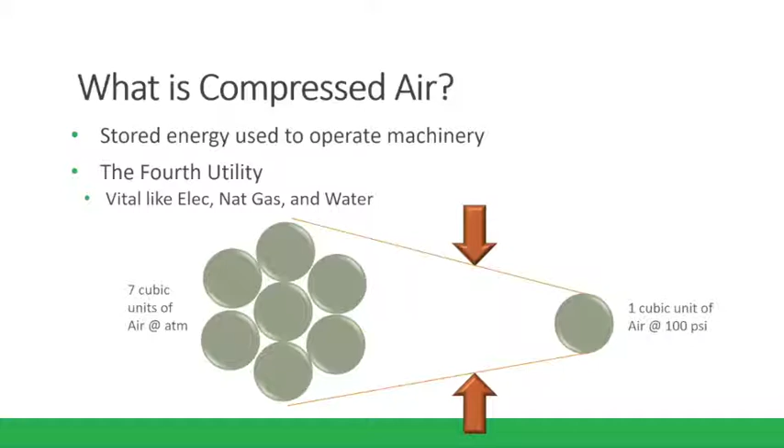Compressed air systems consist generally of a supply side, which includes the compressors and air treatment, and a demand side, which includes distribution and storage systems and end-use equipment. A properly managed supply side will result in clean, dry, stable air being delivered at the appropriate pressure in a dependable and cost-effective manner. A properly managed demand side minimizes wasted air and uses compressed air for appropriate applications. Improving and maintaining peak compressed air system performance requires addressing both the supply side and the demand side of the system and how the two interact.

A modern industrial compressed air system is composed of several major subsystems and many subcomponents. Major subsystems include the compressor, the prime mover, the controls, the treatment equipment, accessories, and of course the distribution system. The compressor is the mechanical device itself that takes that ambient air and increases its pressure. The prime mover powers that compressor. Controls serve to regulate the amount of compressed air being produced, and the treatment equipment removes any contaminants from the compressed air, with accessories to keep the system operating properly.

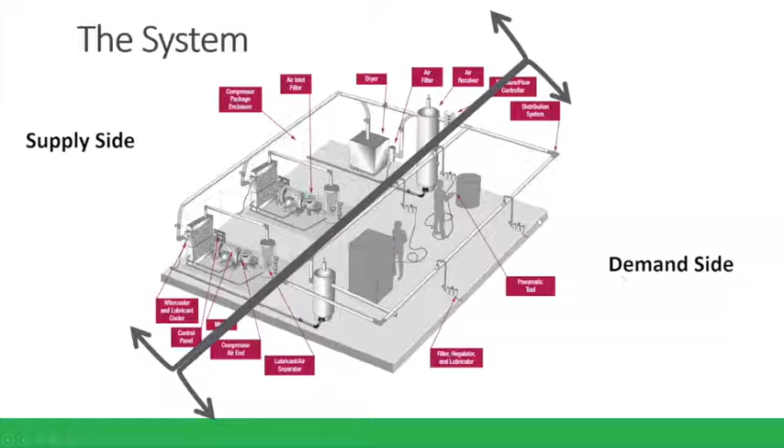All right, so system efficiencies here.

People often assume that because they breathe air, compressed air is free. Well, it is not. To compress the air, one would find that most of the electrical power inputted to compress that air is lost in the form of heat due to the physics and thermodynamics involved.

Once the air is compressed, it must be transported, and losses occur and inefficiencies arise along the way. So in the end, you're only getting about 10 to 15% of the original energy input that performs the useful work in a manufacturing process.

In other words, about 90% of the energy to produce and distribute that compressed air is typically lost, which makes it all the more important to think of compressed air as a resource for production, and that it might be the most inefficient source of energy in a plant.

So again, compressed air is generally inefficient and can be expensive. If we were to think about it in terms of operational costs, how much does it cost to operate an average compressed air system? Well, a quick rule of thumb is that on average, it costs 7.6 cents per horsepower per hour.

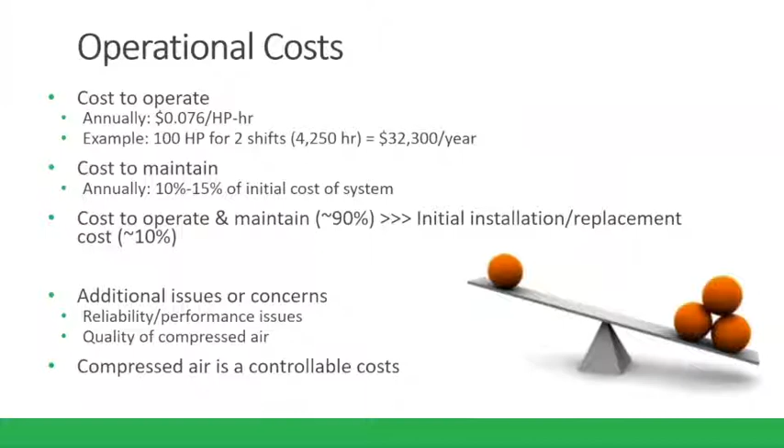So let's talk about the economics for management. That's usually one of the driving factors. A lot of times we talk about it at the end, but let's talk about that at the beginning here. Talking about compressed air systems can be difficult if we're talking to management, and there are a lot of different ways we can talk about the economics.

So the most common one is a simple payback approach, where you get an estimate in terms of cost to upgrade the system versus the estimate in terms of how much it's going to save, and you divide the two, and you have a simple payback period. How many years or months will I see my money? When will I see my investment pay back?

Another one is the net positive cash flow approach. The net positive cash flow analysis essentially looks at that monthly or annual energy cost savings of a project, and if they are greater than the finance payments, the project exhibits a net positive cash flow immediately and should be implemented.

So a quick example is if you were to finance an energy conservation measure on your air compressor system that costs you $500 a month, but you're saving $600 or $700 a month, then it's again a net positive cash flow, and you're winning right out of the gate.

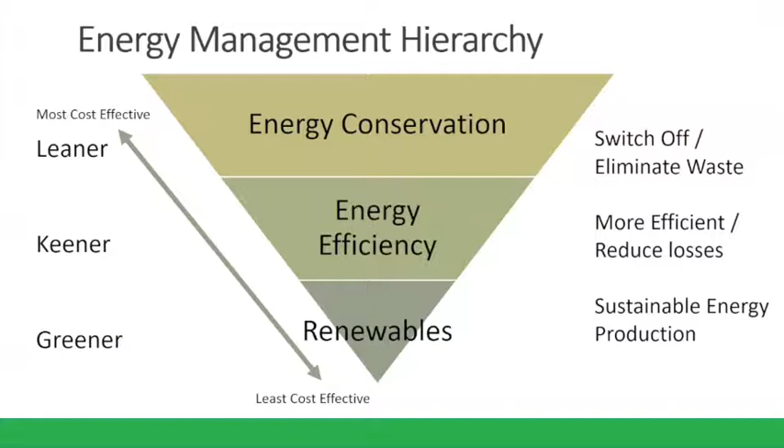All right, energy saving opportunities. Let's get into it.

Compressed air is clean, readily available, and simple to use. As a result, compressed air is often chosen for applications for which other energy sources might be more economical. But users should always consider more cost-effective forms of power before considering compressed air. Many operations can be accomplished more economically using alternative energy sources.

Inappropriate uses of compressed air include any application that can be done more effectively or more efficiently by a method other than compressed air. Examples include abandoned equipment still attached to the system, or idle equipment that's on but not being used. A suggested alternative would be to install a shutoff valve at the inlet process of that equipment and tie that back into the operation of the equipment. You could also have a timer installed if you needed that to be one of the first things to turn on, of course.

Another potentially inappropriate use is cleaning up, drying, or process cooling using compressed air, whereas a better alternative might be a low pressure blower, electric fans, or even brooms. Sparging, aerating, agitating—maybe you're dealing with some liquids—sometimes we've seen compressed air being used for these applications. Well, maybe another alternative that's more appropriate would be a low pressure blower or a mixer.

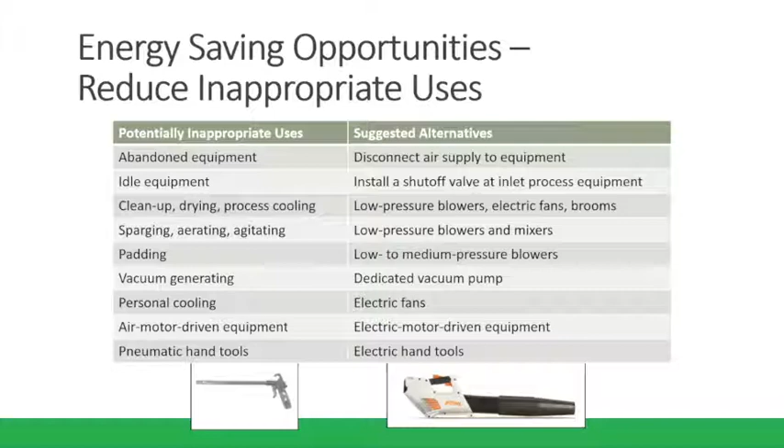If we were to look at another great energy saving opportunity, we would evaluate our system leaks. Leaks can be a significant source of wasted energy in an industrial compressed air system, sometimes wasting 20 to 30% of a compressor's output. A typical plant that has not been well maintained, or where they haven't conducted an air leak survey, might have a leakage rate up to 40% of the total compressed air production capacity. On the other hand, proactive leak detection and repair can reduce leaks to less than 10%.

While leakage can come from any part of the system, the most common problem areas include couplings, hoses, tubes, and fittings - that's where those push-to-lock fittings come into play. The disconnects, O-rings that may have slipped off or were never installed to completely seal, may be missing. Most applications that have an FRL - filters, regulators, and lubricators - that weren't properly set up or have been neglected over time, can be a high source of system leaks.

Open condensate traps - if you don't know where yours is or what it looks like, that could be a source of system leak. Joints and flanges which have a missed or defective weld, controls and shut-off valves where the packing through that stem could be a source, and just old or poorly maintained tools, the point-of-use devices - over time things get worn. These are the common places where you might want to start looking to evaluate some system leaks in your system.

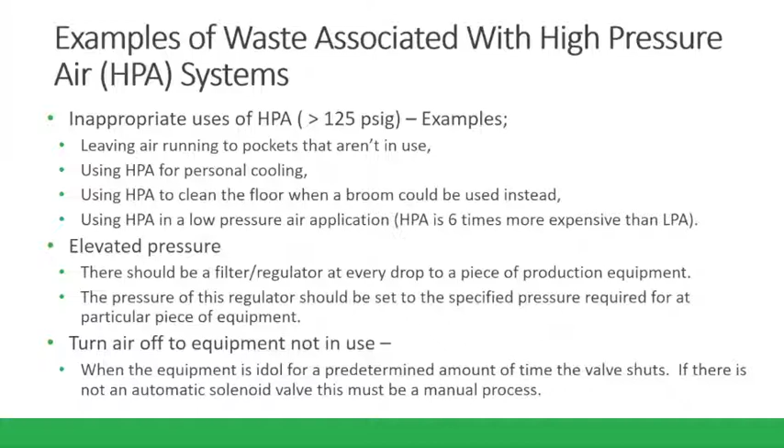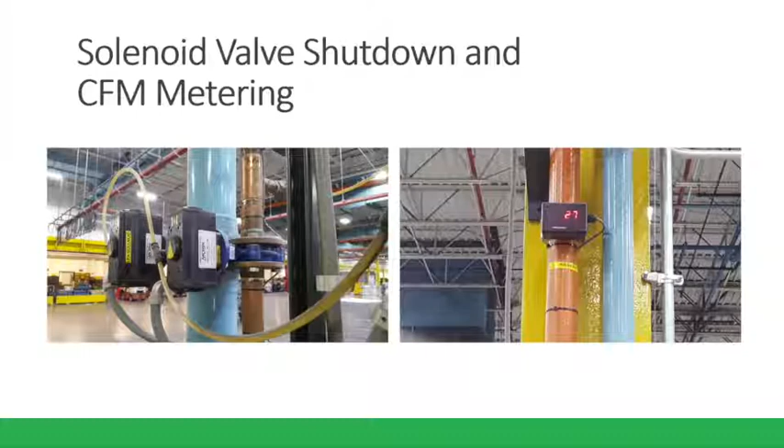Not every application needs a flow meter, but again, it's back to: you can't manage it if you don't measure it. What they find here is, once they did an air leak survey and had that system up and running, that 27 was a good number for their optimal application—that's the amount of flow they needed. If that flow meter starts to increase to 30, 35, 40, you're using a lot more airflow than what you had at baseline, so there might be a leak in the system. It's good for comparison between pieces of equipment.

So what did they do? They installed a leak detection program. They created a statement of need to work with management where they wanted to reduce that system's electrical consumption by identifying and repairing air leaks.

Justification here was that they found their facility operated approximately 1,000 horsepower worth of air compressors. To put that in dollars annually, that's in the range of $335,000 for their typical application. When I looked at all their electrical energy consumption, that was about 14%, so it's a relatively big chunk of the pie when you start considering other HVAC, pumps, fans, lighting, and other industrial process equipment.

They found that their inappropriate uses of the high pressure air were costly. The General Industry Standard for a well-maintained system is leaks at 10%, but they found theirs were a bit higher initially, so they had a lot of opportunity.

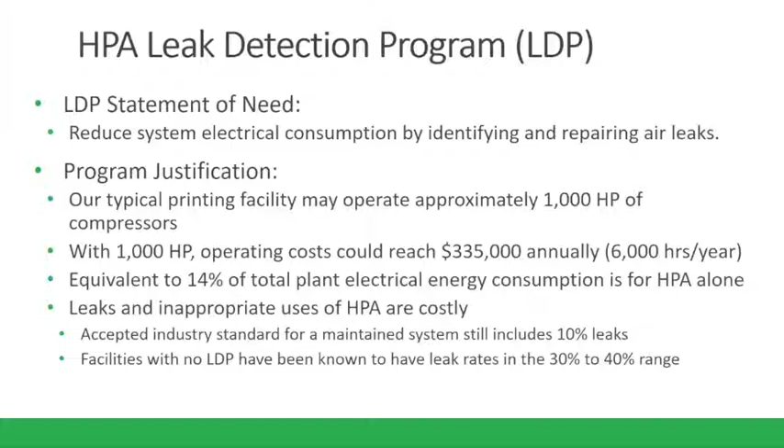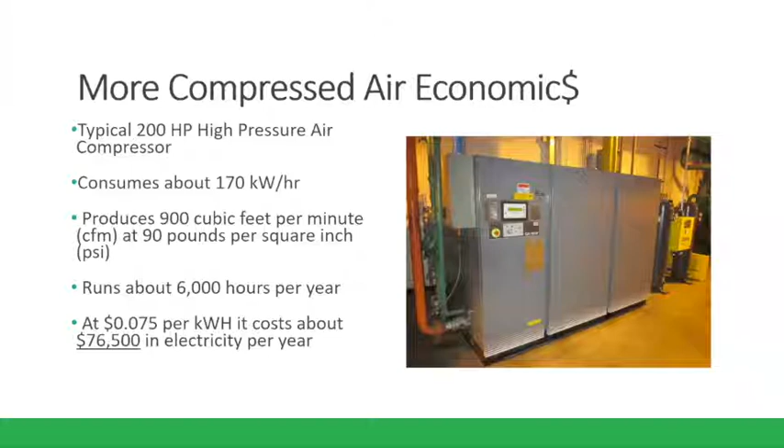Let me give you one more example of compressed air economics. Here's a picture of a 200 horsepower high pressure air compressor, which consumed 170 kilowatts for every hour they ran it, and they got about 900 CFM out of it at 90 psi. A pretty pricey piece of equipment when you consider how much it cost them annually, $76,000. Just to reinforce that it is really a cost, there's a lot of opportunity here.

Now let's get back to their leak detection program and the components of an effective leak detection program. For every piece of equipment, you want scheduled maintenance tasks and checklists, with someone experienced who looks at the equipment all day, every day, going in and checking different things. It breaks down into easy, quick checks.

A good, effective leak detection program invests in leak detection tools. Generally these are ultrasonic leak detectors that can find and usually measure the severity of the leaks. Training and labor is a very important part of an effective leak detection program—certified operators trained in using the equipment, and the frequency, is valuable.

And once you find it, you fix it, right? Whatever your system may be, whether you fix it right away or put in a work order, it actually gets done and gets fixed. And if you happen to have a priority system, one that weighs it more than the other, you might be able to find and fix the ones that are bigger leaks based on your application.

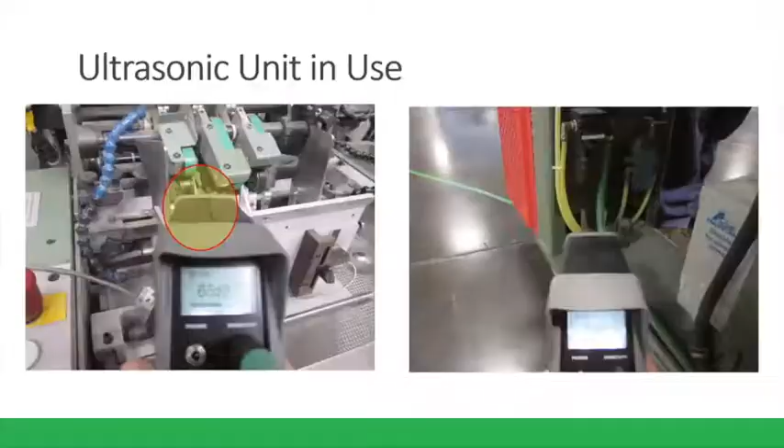Yeah, when you can hear it, you are losing that much. If you're hearing it, that's a lot. I threw a stat out there, but I didn't put it on the slide: approximately 80% of the air leaks that we find, you can't hear, and so that starts adding up. But if you can hear it, that is a red flag sign that your system is leaking about 40% or more of its compressed air capacity.

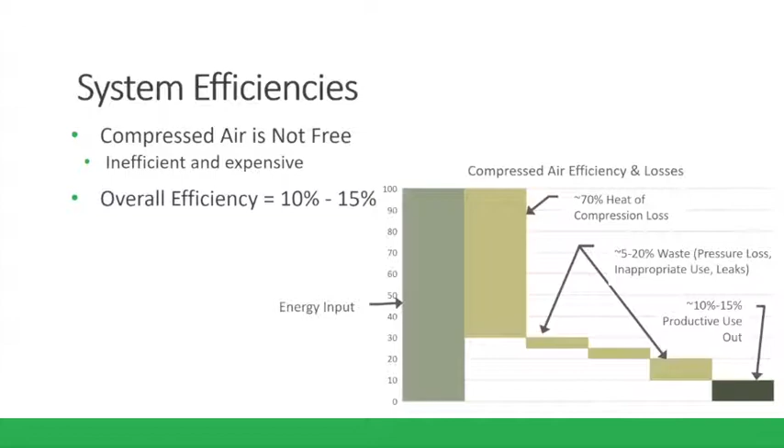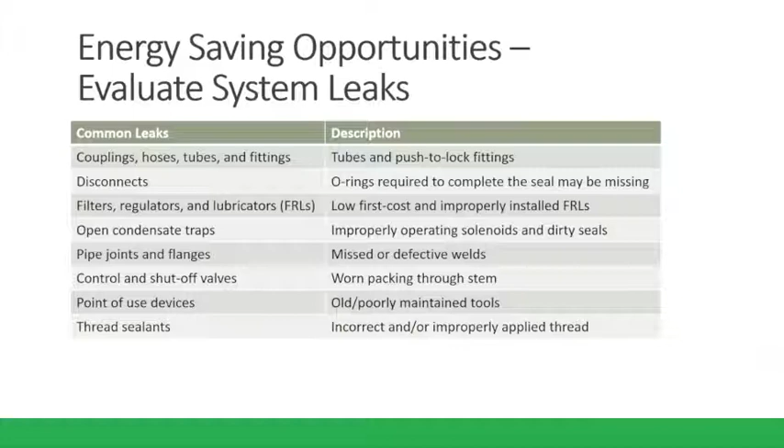So if you can hear it, is it a 1/16 of an inch, or an 1/8, or a 1/4 inch, or even smaller? At what point when you start hearing it can you equate that to the size of the leak? I would say conservatively assume it's a 1/16 of an inch minimum. Okay, easily.

Good question. But if you can hear it, that's one thing. You hear it when nothing's operating, right? When your plant's down. If your plant's operating, you're using that energy, so it's got to be when things are down. I've had more than one person tell me that when things are shut down or quiet, you can hear air hissing all over the place. That's just thousands of dollars going up in the air for no reason whatsoever.

Let me go into the 3 different layers of analyzing your system. The first, depending on the size of your system, there are ways to calculate your leakage rate on a whole system basis. If you measure amperage and put data loggers on the system, you can calculate how much that is. Do a pre-evaluation, then a post-evaluation after fixing some things. You can see that result with data loggers, or work with a third party to install that and verify and manage your air compressor system. So there are opportunities there. The simpler layers are more superficial, less detailed. It depends on how detailed you need to get.

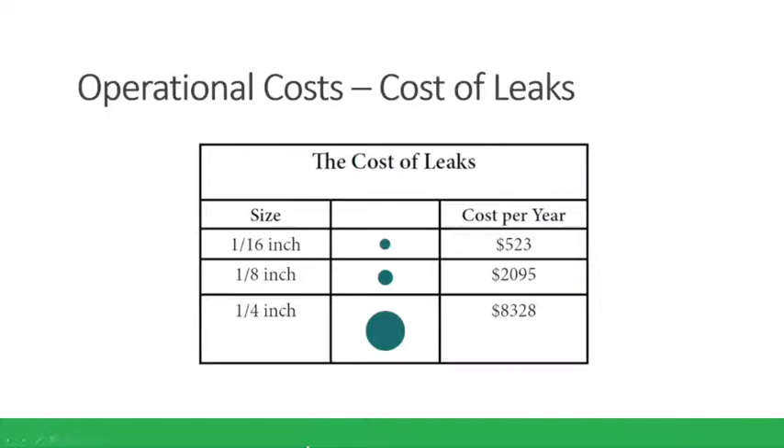Okay. Any other thoughts or questions? I have one more, but I don't want to dominate the conversation. See if anybody else has a question while we're waiting. Yeah, I'll wait a second.

Tony, what's the cost of the ultrasonic detectors? You mentioned there are two different types, an analog and a digital. Just to get a ballpark idea, if a facility wanted to purchase one of those for their system, what would that cost them?

Good question. You'd want to weigh it depending on the size of your system. Our initial set, and you can rent some too - if you're only going to look at it for a short period of time, you can find a company that rents ultrasonic leak detectors as well. But budget $500 up to $1,000 for that piece of equipment, depending on if we're looking for a ballpark. That's what we're talking about here.

Oh okay, so that's not too bad. Depending upon the size of the printing operation, it might be worthwhile to invest in one, or rent one. I didn't realize that was a possibility.